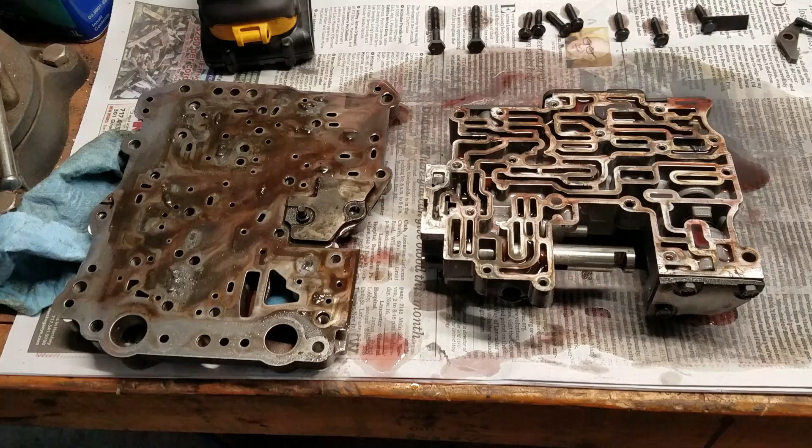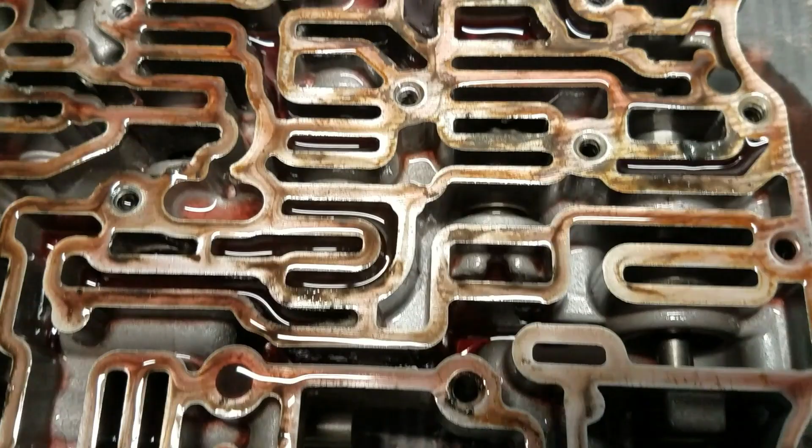Delving into the valve body here, and this is equally as crudified as the rest of the transmission, not surprisingly. We got heavy, thick goo here in the valve body plate, and this is all dirty. I mean, here's thick residue. So it was definitely time for a cleaning at a minimum.

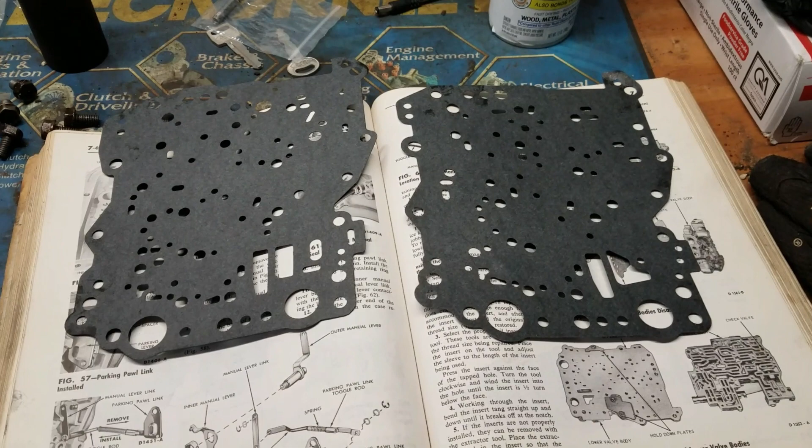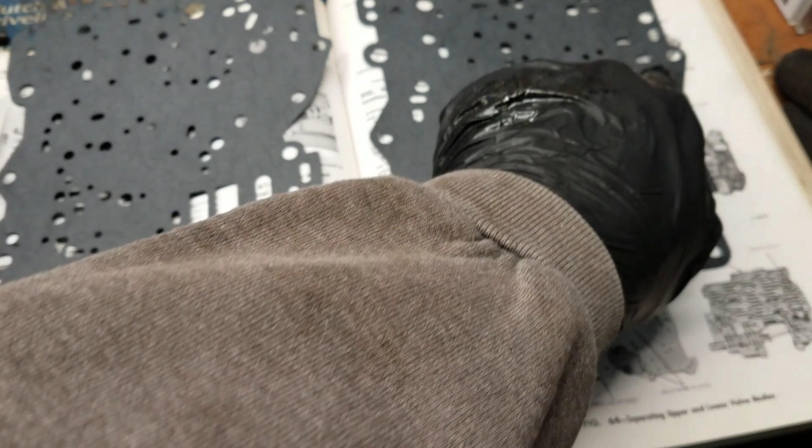Well, here's a pro tip. This is a 56 or 7-year-old gasket we've got here, and it's not wanting to come off at all, so I'm going to have to chisel it off. But when you get one of these kits, you get multiple decals and multiple gaskets depending on what year transmission you have. So you want to match this up before you hackery the original all up. And it turns out it's this one. You can see these openings here are the easiest way to tell the two apart. There's also some differences up in here. But make sure you match that up before you get too far.

Alright, well this sucks. This is like 30 minutes of my life so far, chipping this old gasket off of here. This is just miserable. It's about as much fun as prepping for your colonoscopy.

I don't know of an easier way to do this. You know, I like to take my air-powered cleaner to it with its little 3M Roloc disc on it, but you can't do that with these. That's a really big mistake. So I guess we just keep plugging away at it, but this is not fun. Do not look forward to this if you're taking one of these apart.

Alright, back to it. I wonder what Vice Grip Garage is doing today. It's probably not doing this.

An hour after I started, this is where we are.

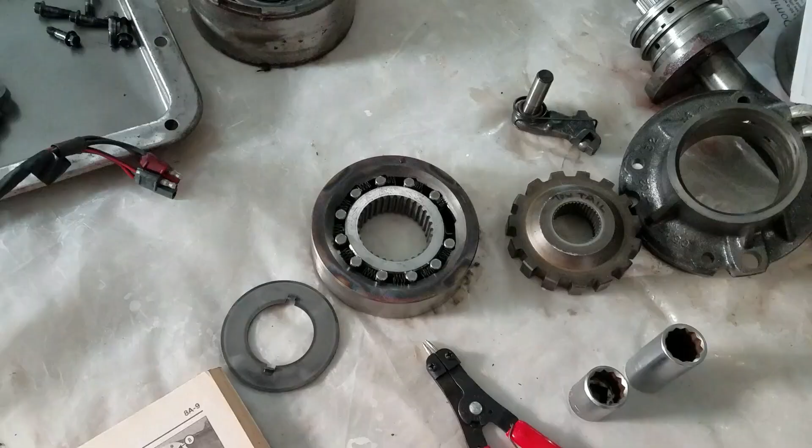Alright, so here's some weirdness. I'm not sure if somebody has been in this transmission before or not. It wouldn't appear to at first glance, but I'm finding some things that lead me to believe that maybe it's been apart. One is that there is a spring and dowel missing from this one-way clutch. I can't imagine I would have lost it. The spring's easy to lose, but not one of those pins. They're pretty substantial. And the only place that this thing's been is on this table, from the time I took it out of the case to the time that I put it here. And it was missing when I picked it up off the table after it dropped out of the case. So that makes me wonder. I haven't found those pieces anywhere.

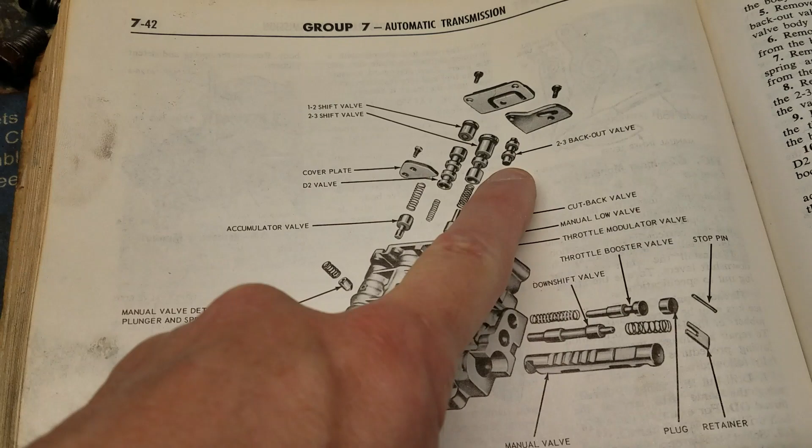And the other was, when I was doing the valve body, which I finally got finished with, this arrangement here—I'm trying to think which one it was now, I think it's this one, yes—this piece and this piece were reversed in the order that they came out of the valve body. So was it done at the factory that way, or did somebody have their fingers on this before? Or is the book wrong? Well, I seriously doubt that the book is wrong.

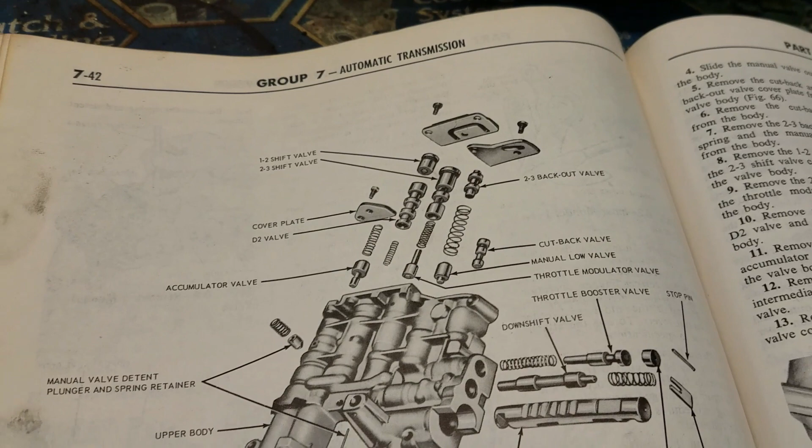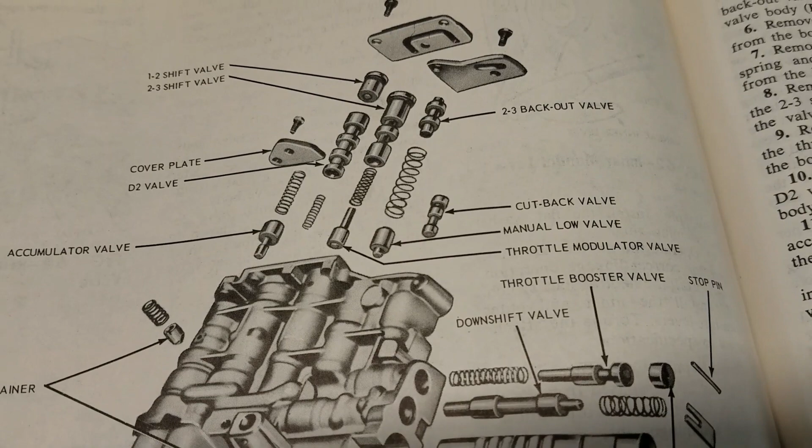So I put it back together the way the book illustrates it. I mean, it did function before, but I didn't really drive it enough to say it worked well or not. So I'm going with this, because this is the factory service manual, and I can't imagine that we would have had an exploded view backwards all these years.

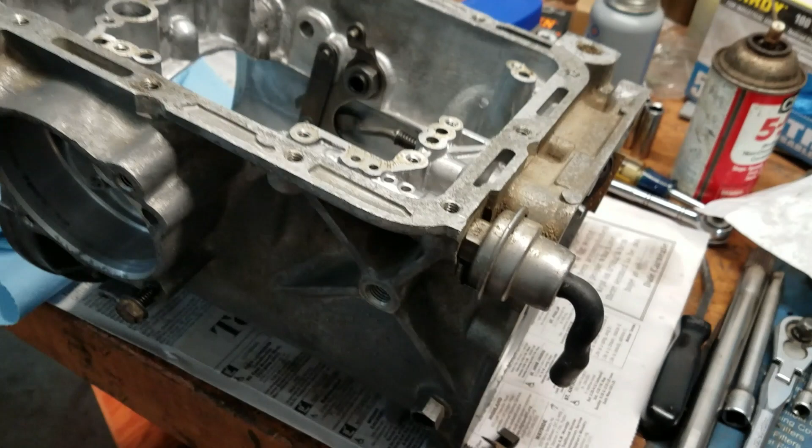So that's where we currently are. The case is completely apart. I just finished replacing the shift seal, which is in here, and the O-ring on the outside.

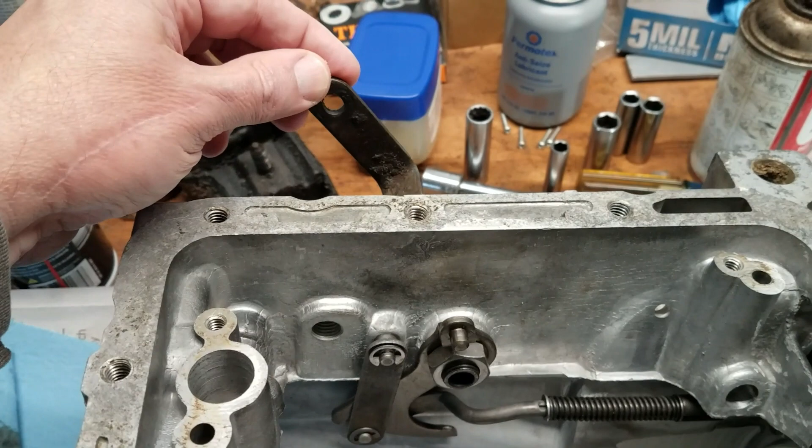And I can't stress enough when doing this, because it made me look twice. When you take these things apart, make sure you know what position these parts are in, because this lever can go on this shaft two different ways. And if you do it wrong, you got to tear the whole freaking transmission apart to fix that. So, not cool.

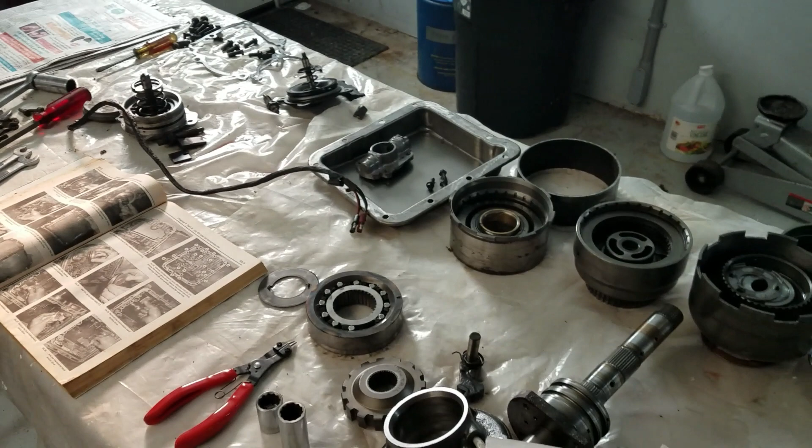All right, so that's currently where we are with the C4 rebuild, and going to start attacking these clutch packs next. I've got the case finally cleaned up enough that I don't feel bad about using it and moving it around.

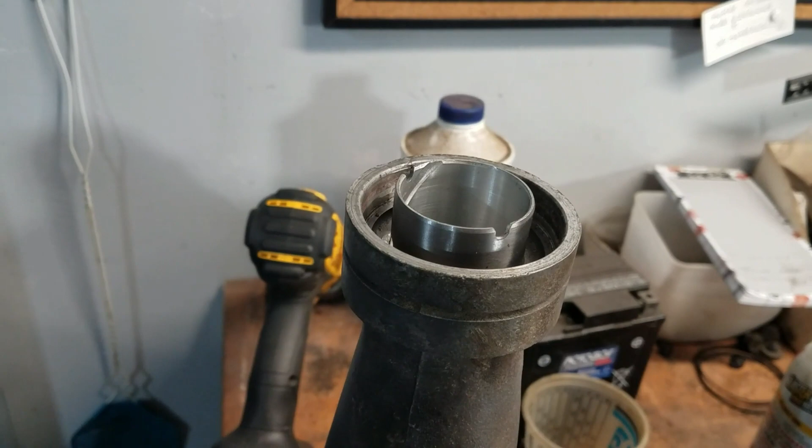This bushing was worn on mine, and I'm replacing that, but despite freezing this, I couldn't drive it in very far. Worrying about the risk of damaging this trying to hammer it in, I'm just going to press that in. I don't currently have a press. I'm debating if I want to buy one or if I just want to go down to the local garage and have them do it, but that's the current status of that. So we're going to get back to it here and press on.

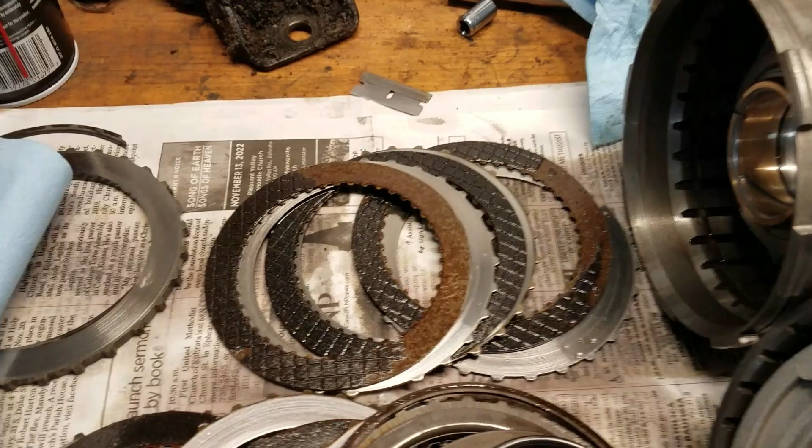Okay, we're diving into the clutches now, and here's what we found. These things are totally wasted. That explains a lot of the chunkulas and slime that's inside this thing. So these are junk, obviously. And these actually didn't look too bad on this one. You could still see the ink imprints on a couple of these, but those are definitely wasted.

I do have a little bit of a concern here with the amount of rust that's on this thing. Now these are where the bands go, so I don't think this is going to matter. But it's definitely got some water intrusion here. It must have happened when it was sitting. So hopefully that's not going to be any problems. I'm going to try to figure out a way to clean that up. But that's where we are currently. I've got to get a couple of clamps to be able to compress this inner piece here. It's all spring loaded, so I can get that out because that has a seal around it.

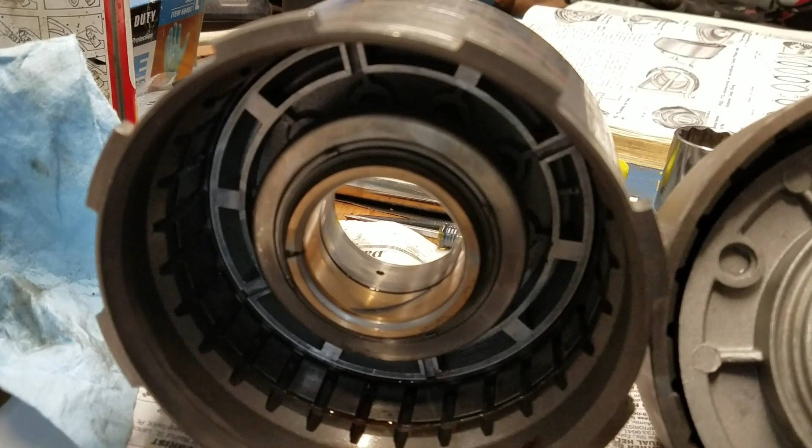If you're doing one of these C4s, one of the problems you're going to run into is removing this guy, because most wrenches won't fit. This is too narrow of a gap. The shop manual makes reference to a special tool, or how to make one out of your Snap-on wrench. Yeah, we're not going to do that.

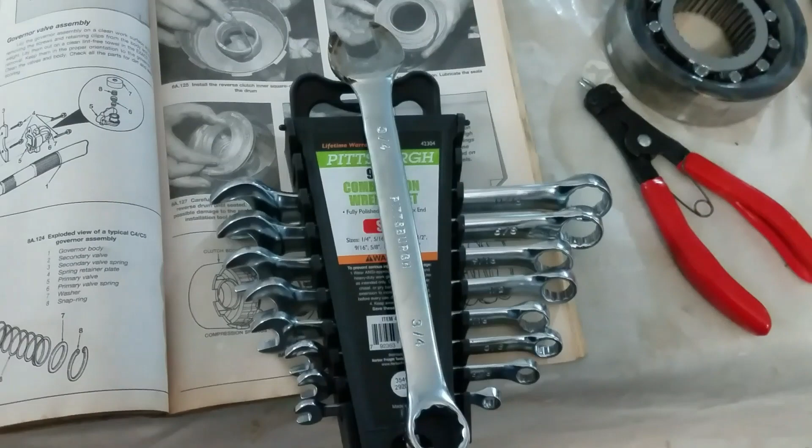So what I decided to do instead was go to Harbor Freight and buy this set of wrenches, 9 pieces for $10, and took one of these and made a sacrificial lamb out of it in a couple minutes with the grinder, and now we've got a wrench that actually works. So always think about Harbor Freight when you need to do something like that where you got to butcher a tool, because in this case it doesn't have to be the most ultimate super strong tool, just one that you can make work.

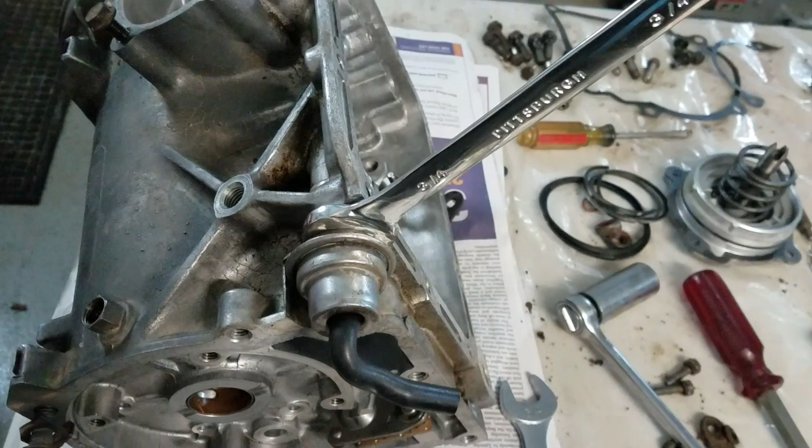$10, not a bad deal. And I got 8 more.

All right, we're under the car, and this shows the Addco sway bar I just got. This is a 1-inch bar, larger diameter than the factory one would have been. You can get them larger than this, but I think 1 inch is plenty.

The sway bar from the factory was only, as far as I know, on the station wagon models. It may have been on the sport coupes, I'm not sure. But they're not easy to find, and they're not the biggest thing either. These 1-inch bars are significantly bigger than the originals.

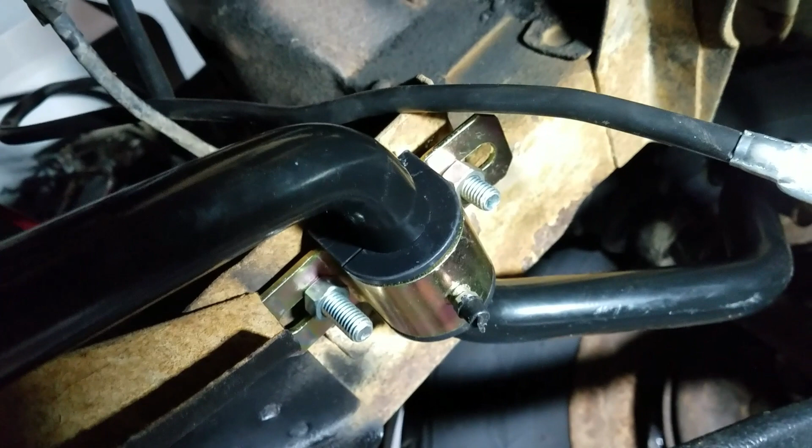The originals mount here on the frame rails. There's actually these perches here, you'll see, that are welded on, and the holes are already drilled and everything for them, so there's nothing required to put a sway bar in one of these cars other than the sway bar and the hardware, which Addco does not supply the bolts that go here. Now, I just mocked this up, so these are too long. I'm going to replace those with proper grade 8 bolts.

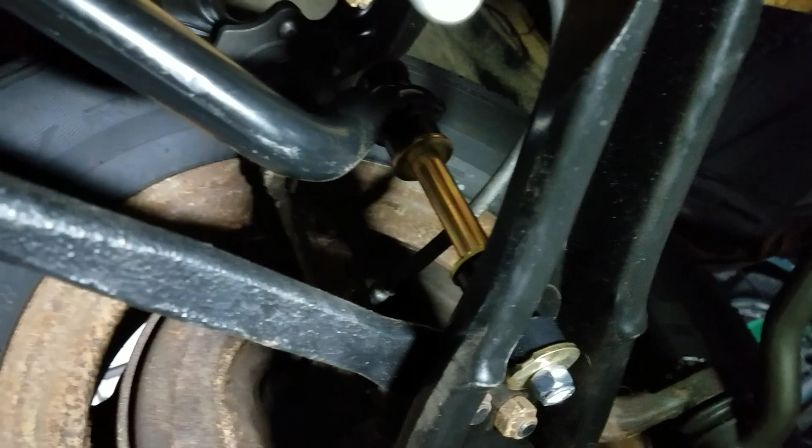But they do give you the end links and all the hardware for that, and that just goes in the holes in the lower control arm. I'll show you how this mounts, in case you're trying to figure it out, because it does not come with any instructions at all. So you have to figure out which way this bar gets oriented. The short version is that the ends curve to the top. So it kind of is self-evident once you're under here, really. But very easy to install.

I got this on eBay from an independent vendor for less than Summit's price, even with a 10% discount coupon. So it pays to shop around on these. Addco is pretty much the only one that makes this, so no matter where you're buying it, it's going to be an Addco bar, which is fine because they're very good. I've used these in the past.

I had one on my F100, and they work really well. They're decent quality. As you can see, they've got grease fittings here for your center bushings to keep them from squeaking. So really, I have no complaints with these products for what they cost. There is another brand out there, I want to say it's Hellwig, that's probably close to twice as much, and I don't know why you would spend the extra money, honestly, for a street car, but that's that.

So just wanted to show that. I got that in, got a good price on it, thought I'd buy it a while ago. This should transform the handling quite a lot.

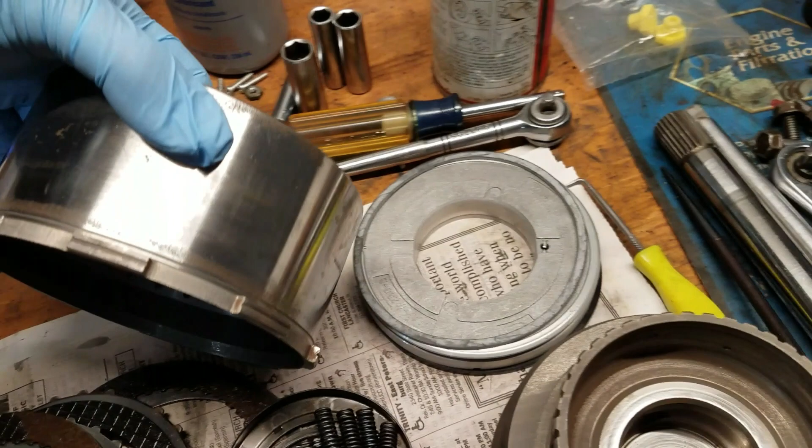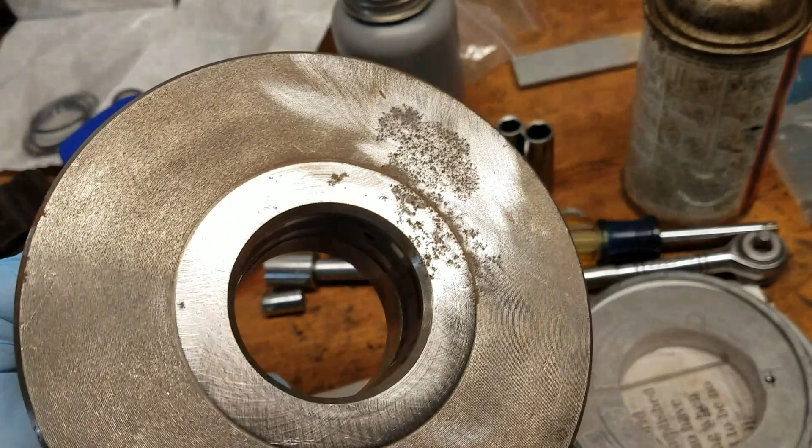All right, and back in the world of the C4 transmission, I got the springs and dowels, the kit for that. I'm missing just one for some reason, I don't know why. So I think this was about 15 bucks. Took these down to my friend's place, put them on the lathe, and we just spun them and went over them with some polishing cloth and got most of the ugliness off. I mean, there's still pits in there, but barring purchasing new ones, which I am not going to do, that's as good as they're going to get.

This one's probably the nastiest. You can see there's definitely pits worn in here, but this is only a surface for one of the shims to ride on, so I don't anticipate that being a problem as time goes on.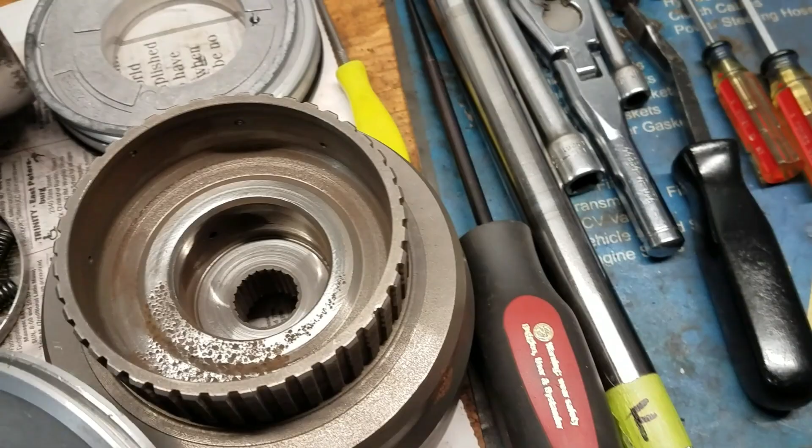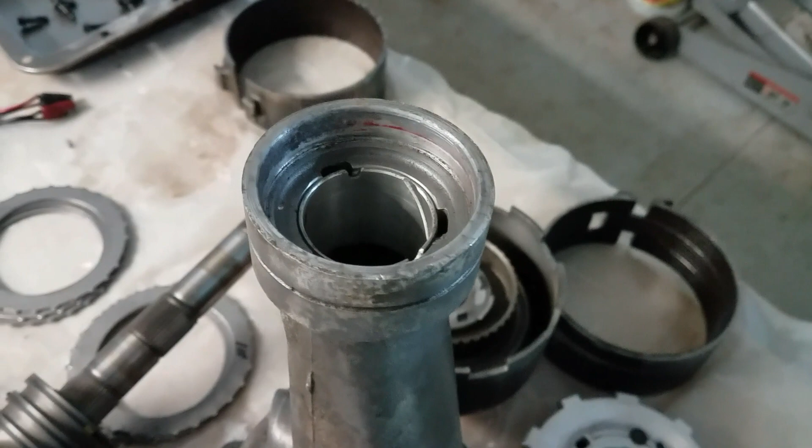The other thing was the tail shaft housing. I got this bushing, or whatever you want to call it, pushed in with a press. He also had one of those that we could use, so I did not go out and buy a hydraulic press for $190. I don't know that I would use it enough to justify its existence here in the shop. I'd love to have one, but I'll see if I can keep my eyes open for a used one maybe.

So today begins the reassembly process, and we'll start a new chapter once that's going on, or hopefully done. See how far I get with that today and get that back in the car.